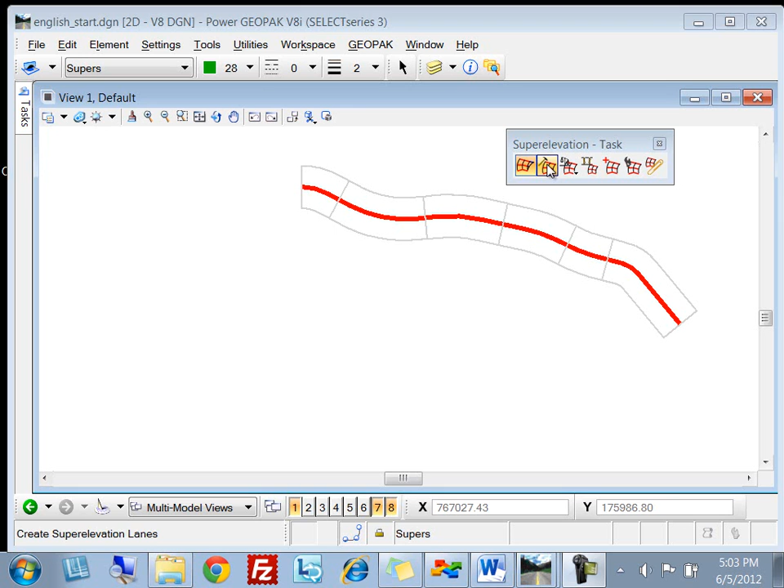In this video, we're going to discuss how to create super elevation lanes. In this case, you can see we already have our super elevation sections drawn, and it will automatically move us to the tool to define our lanes. If not, we can select the tool and then define our sections or grab one of the sections we want to use. So we'll go ahead and select it, and it wants to know our first lane name.

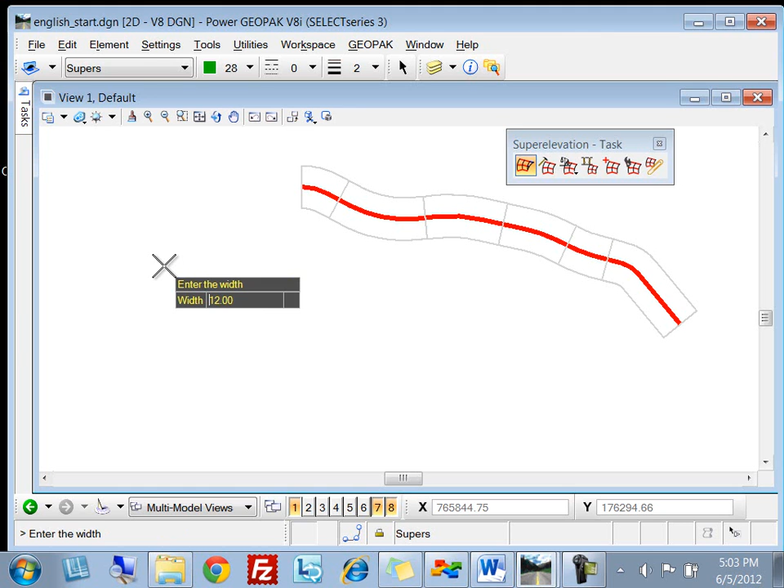In this case, I'm going to put 2 lanes on the right, 2 lanes on the left, and you can do them in any order. So we'll do our right lane first, and we're on the right side of center line. The inside edge, I'm starting from center line and going out 12 feet, so my offset's going to be 0. My width is 12, and my cross slope is minus 1.5 on the first lane. And you can see now when I did that, that it created a yellow lane on the right-hand side.

So I'll go ahead and I'll do the other right-hand lane. I'll just call it RT-2. Still on the right side. This time I'm going to use an offset from 12. And we're still going to make it 12 feet wide, so it's going to be 12 out to 24-foot offset. And this time our normal cross slope is going to be minus 2. And if I zoom in, you can see that we have 2 yellow lanes now, slightly different coloring.

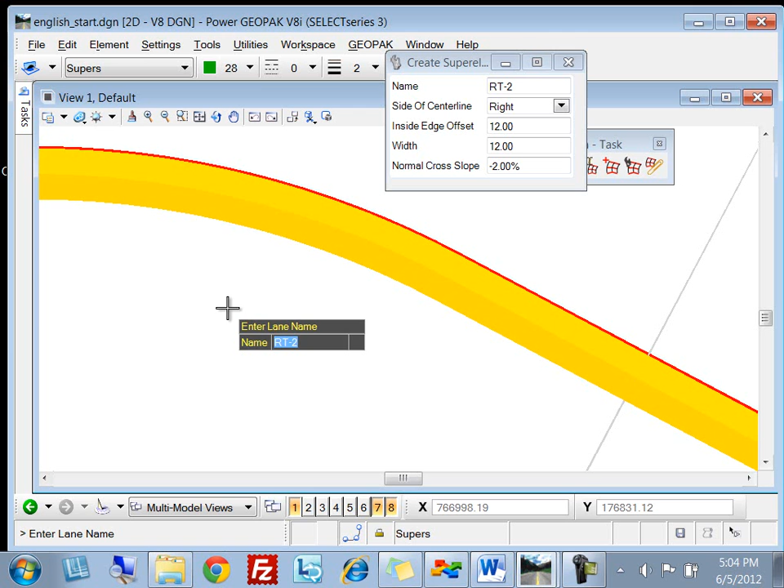Now keep in mind, if you don't have a change in cross slope like I did, you could draw this all as one 24-foot lane. The SEP file that you use in the super elevation preferences allows you to specify 12-foot as the computational value, but still have it drawn 24-foot wide. So you may want to check that out.

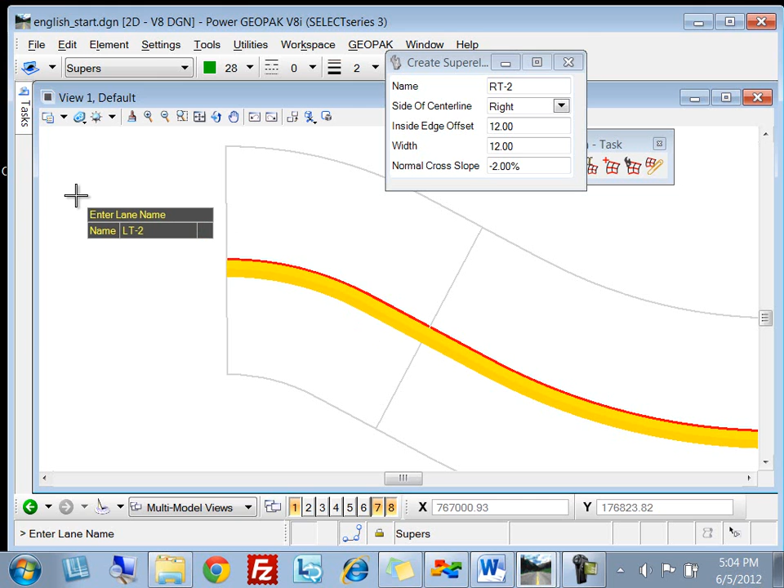Now we're ready to move to the other side of the road. And so I'm going to do my left one. And actually I'm going to do my outside lane first because I can reuse a bunch of my prompts. So I'm going to change it to left 2. I'm going to change it to the left side of the road. In this case, I'm going to start from the 12-foot and go out to 24-foot. The width. And I again want my minus 2%, so I don't have to change anything. And you can see now that it drew a green lane on the other side.

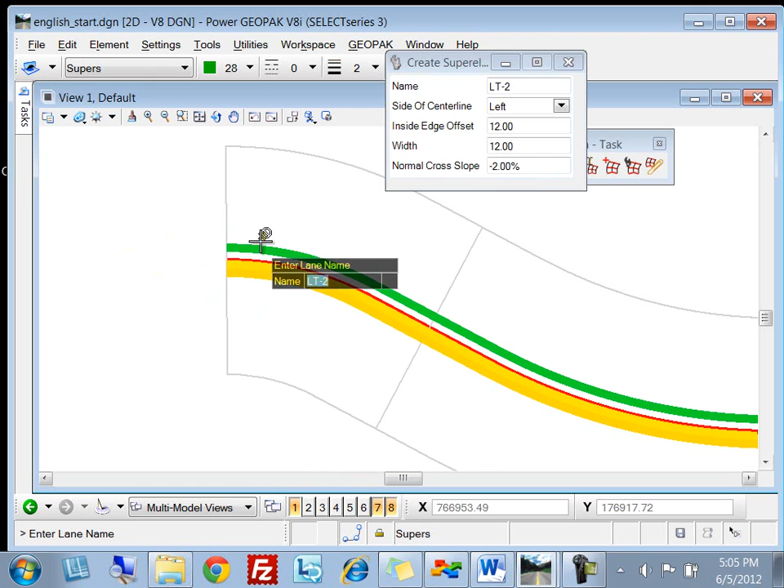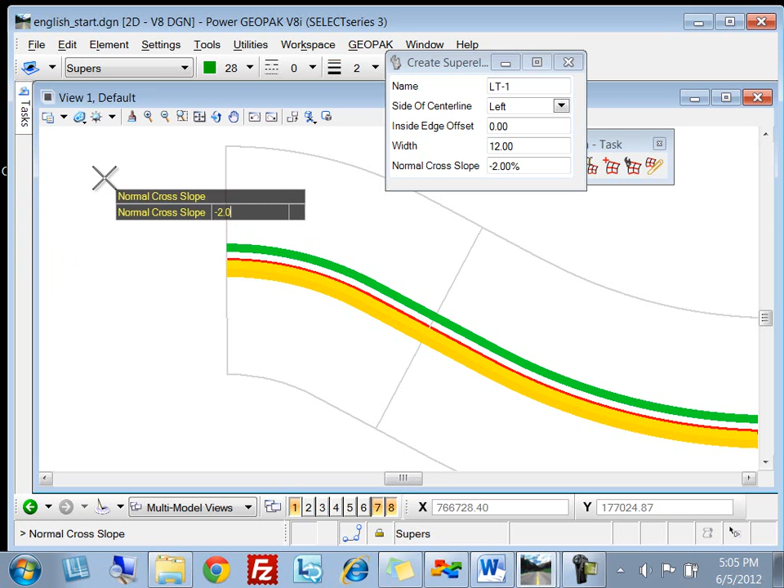And since I did the outside lane first, we still have that inside lane to do. And so we'll finish up with that. I'm going to go ahead and call that LT1. I'm on the left side. And now this time I want to start from center line, so I'm going to use 0 offset, 12-foot width. Cross slope, I'm going to use a minus 1.5 for my inside lanes. And now, if I zoom in a little bit, you can see that there is a subtle difference in the shading between the 4 lanes.

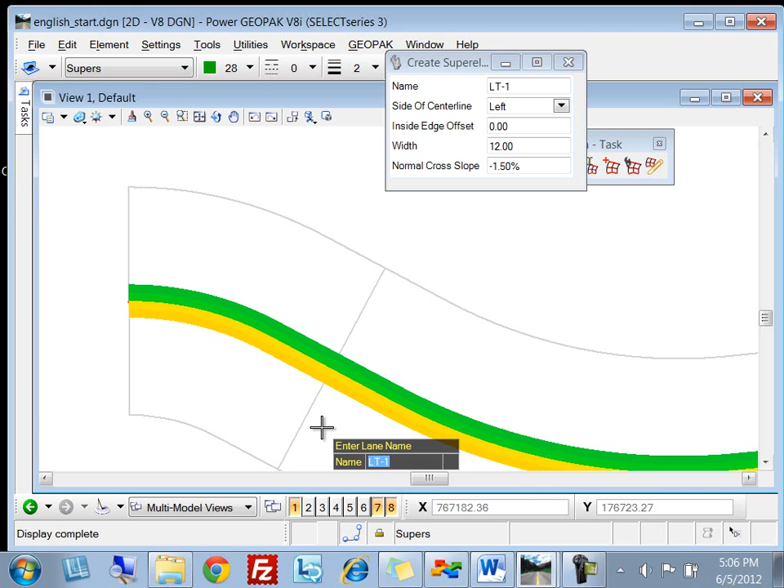Now keep in mind, anything that I'm drawing at this point, I have done no calculations. All I've done is identified the lanes. And so in our next step, we're going to actually do the computations, and we can do that one of 2 ways. We can either run a SRL or an SEP file and have it automatically calculate based on rules, or I can import the information from a spreadsheet. And you'll see that in subsequent videos. But for right now, we've got all 4 lanes.

One other thing to keep in mind is this roadway is actually 2 lanes. I'm going to reset to close my command here. 2 lanes for through lanes, but then those outside 2 lanes are going to be turn lanes. Well, you can see that I actually drew them the entire length of my project, even though the turn lanes are going to be intermittent. They're coming and going in various pieces.

And what I'm going to do is use my template and some graphics to define where I actually want the turn lanes. And so even though the shapes or lanes are going to run outside of my template, that part will be ignored. So we've got our 4 lanes. We could continue to add more lanes to it if we wanted to. Otherwise, we're ready to move on to calculate super elevation.